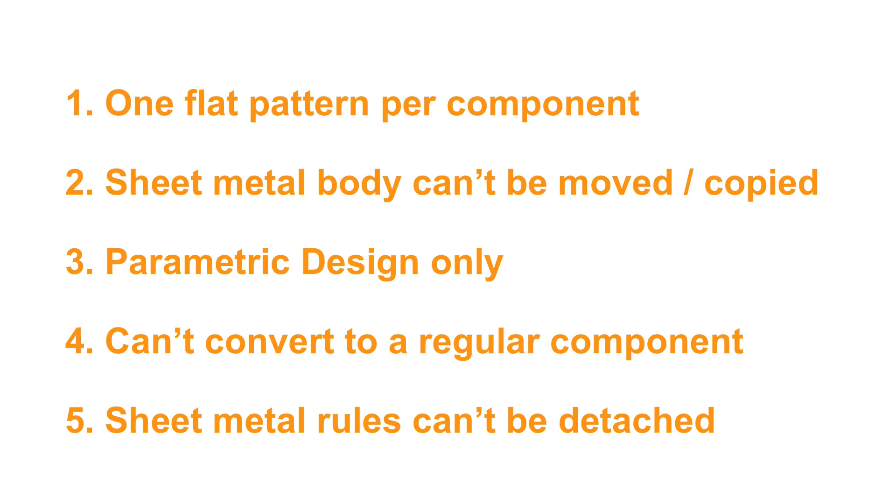Now let's start to create a simple sheet metal part with a few flanges. I'll hit the keyboard shortcut letter R to call the 2-point rectangle. I'll select the front plane, and then I'll click at the 50mm mark. Next, I'll drag my mouse cursor out and type out 100mm for the width, and I'll hit the Tab key to lock the dimension in place.

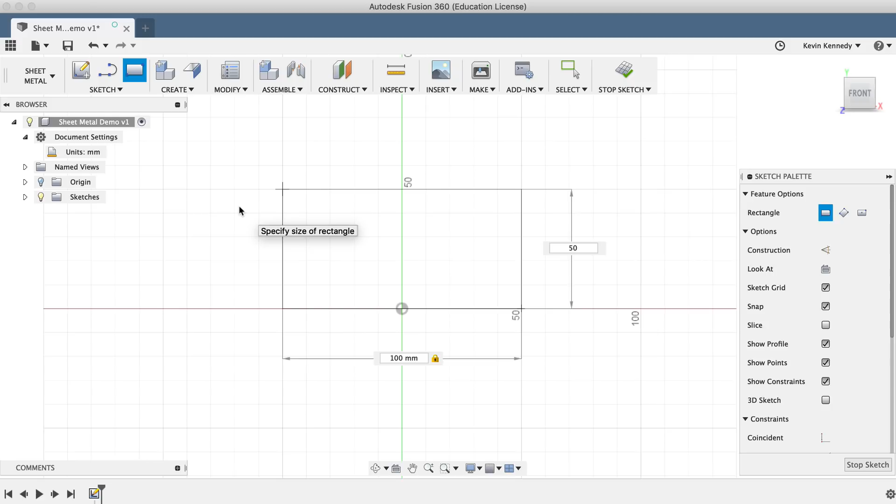Then I'll type out 50mm for the height, also followed by the Tab key to lock the dimension in place. And I'll click with my mouse to set the rectangle. Lastly, I'll click Stop Sketch to exit the sketch environment. Now let's create the base flange. I'll select flange in the toolbar and then select the rectangle that we just created.

You'll see that the flange dialog box gives us a few options. The first one is simply the profile, as you can select multiple profiles if you need to. Second is the thickness, and you'll notice that you can set this to either side of the profile, or you can also set the thickness to symmetric. For the operation, we'll want to set it to New Component. After doing so, you'll notice that we now have the option to select a sheet metal rule.

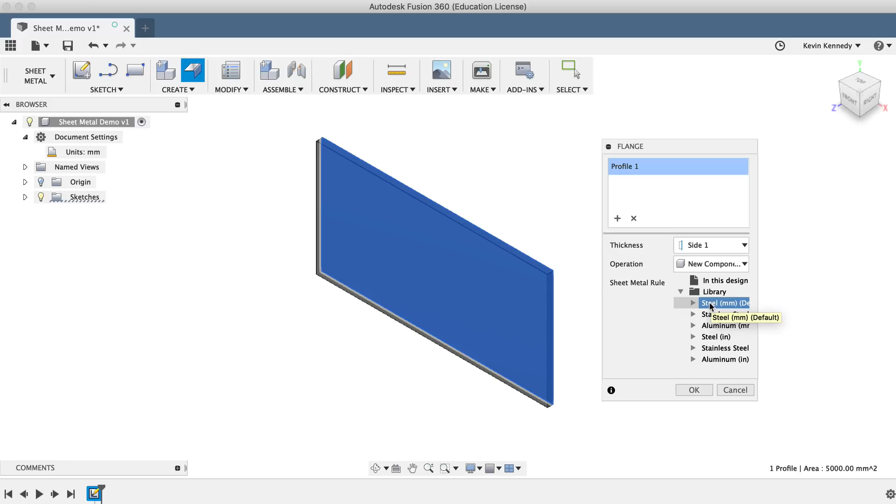Now you can toggle open the library folder to see all the different preset sheet metal rules. But we won't worry about this right now, so I'll click OK to continue. You now have the base component created. And you'll notice that the component in the Fusion 360 browser has a sheet metal icon next to it.

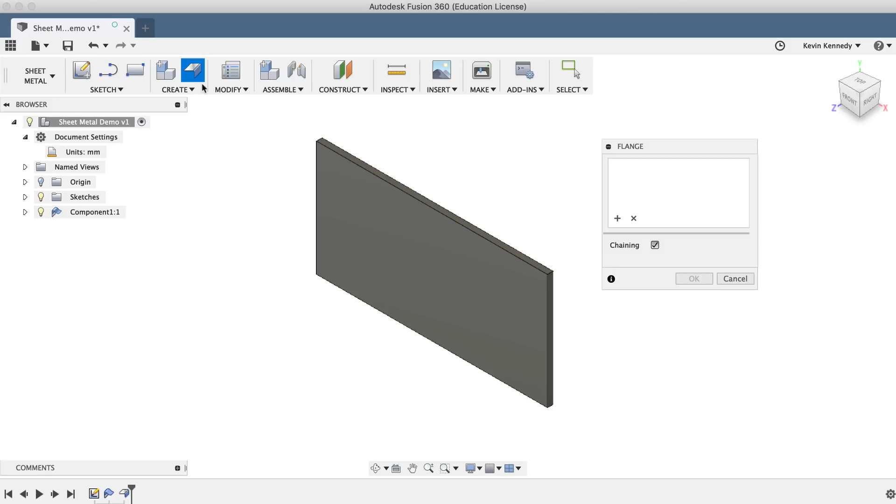Next, we'll want to create 3 flanges. Once again, I'll select the flange feature in the toolbar. I'll select the top, the left, and the bottom edges. The next option is the height of the flange. I'll set this to 25mm. And you'll notice that it instantly creates flanges on all of the edges that we selected. And of course, we could continue to select more edges, or we can cancel any of the edges that we selected.

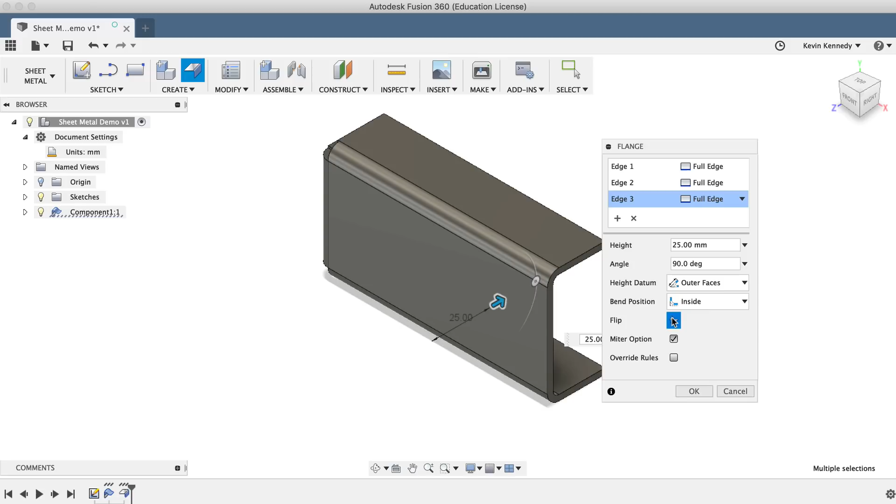You'll notice there are also a few other options that we can select, including the height datum or the bend position, which you can select inside or outside, and a few other options. For this tutorial, I won't be covering each of these. You'll see that you can also flip the flange with the flip icon. You can turn the miter option on or off, and you can override a bunch of different rules here. For now, I'll simply click OK so we can take a look at setting up the sheet metal rules.

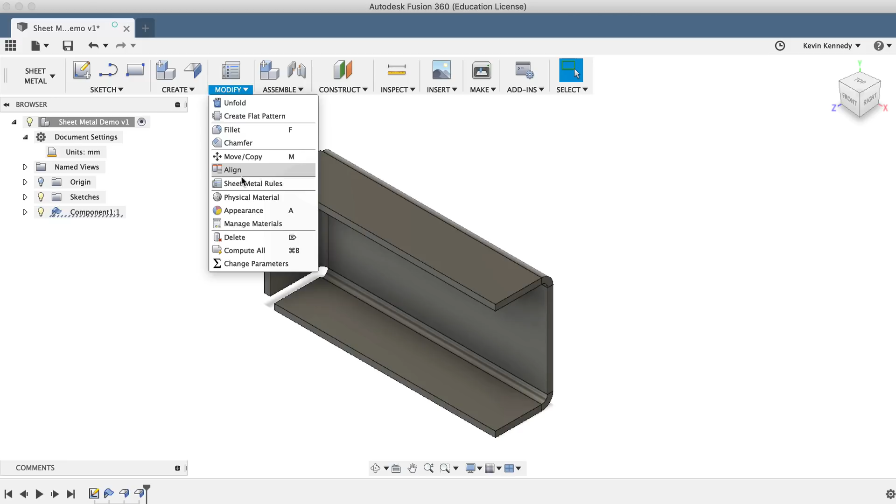In the toolbar, click Modify, and then select Sheet Metal Rules. This will open the Sheet Metal Rules dialog box. I'll select the steel millimeters rule from the library list, and I'll right-click and select New Rule. In the New Rule dialog box, I'll change the name to include Demo instead of the number 1, and I'll specify a thickness of 1.5 millimeters.

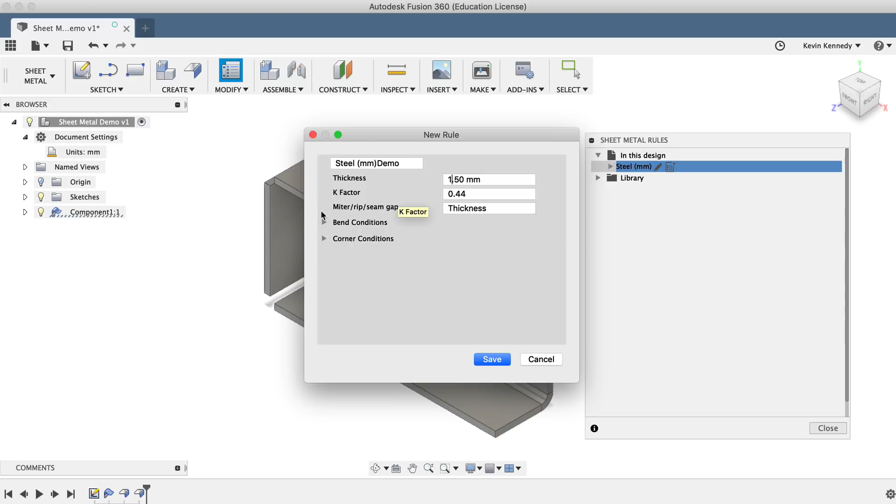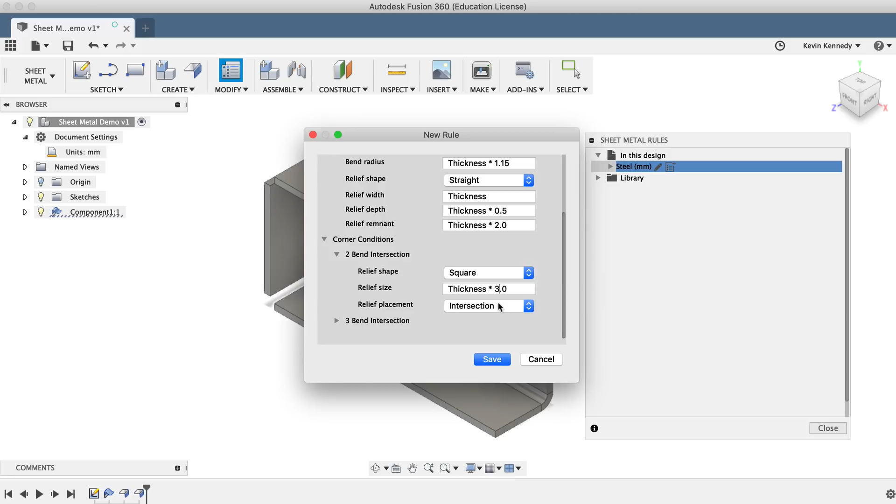At this point, I also want to specify the bend and corner radius thicknesses. To do this, I'll have to toggle open the bend conditions. I'll change the bend radius thickness to thickness times 1.15. I'll also open up the corner conditions and the 2 bend intersection. I'll set the relief shape to square, and I'll change the relief size thickness to 3. Lastly, we'll want to click Save to save this new rule, and you'll see that it now exists in the Sheet Metal Rules dialog box.

Now we'll have to apply this new rule to the design. To do so, toggle open the Sheet Metal component in the Fusion 360 browser, and you'll notice there is a rule setting. Click the Switch Rule icon, and then we can select the demo rule that we just created and click OK. And our part is automatically updated with the new set of rules.

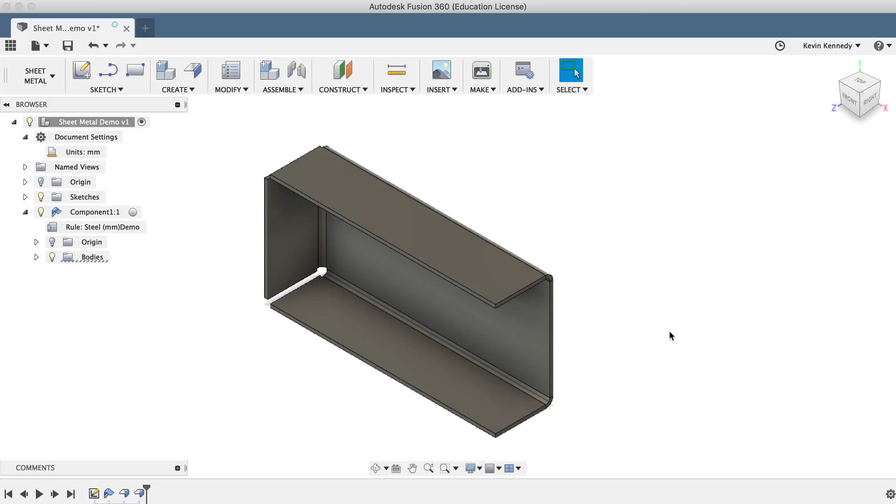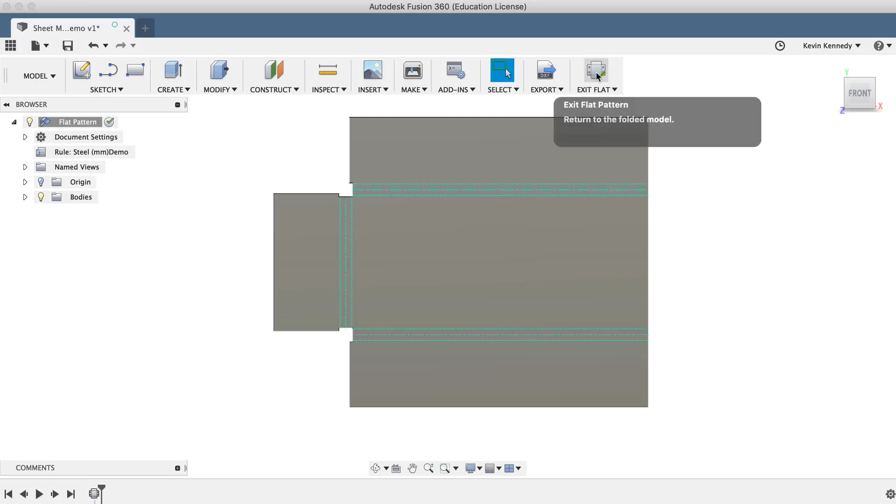Lastly, we'll take a look at creating a flat pattern. Select the Modify drop-down list and select Create Flat Pattern. When using the tool, you'll also be prompted to select the stationary face from which all the flanges are folded. So in our case, you'll need to select the front face and then click OK. This immediately creates the flat pattern, and to quickly go back to the three-dimensional model, you can click Exit Flat Pattern in the toolbar. In the Fusion 360 browser, you can toggle open the component and activate Flat Pattern again by selecting Activate Flat Pattern.

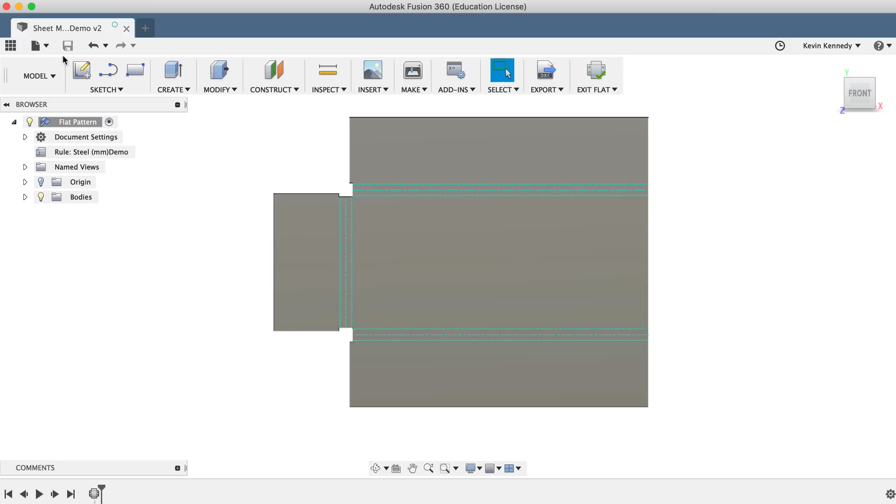Now, obviously, one main benefit of 3D modeling your sheet metal design is that you can create a two-dimensional drawing from the model. I'll go ahead and hit Save and title the version description as Flat Pattern. Now you'll also notice that our flat pattern throws us back into the model workspace, not the Sheet Metal Workspace. This means that we can also go up to File, New Drawing, From Design, and you can create a 2D drawing for your sheet metal design.